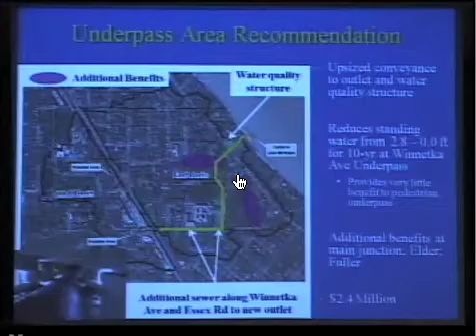The Cherry outlet is to the north of that. What we had recommended here was some new storm sewer on Sheridan Road outletting to the lake, which would have

a water quality and an energy dissipator. It would be an additional outlet. The reduction on Sheridan Road at Cherry Street would be for the 10-year storm from 0.4 feet of flooding depth

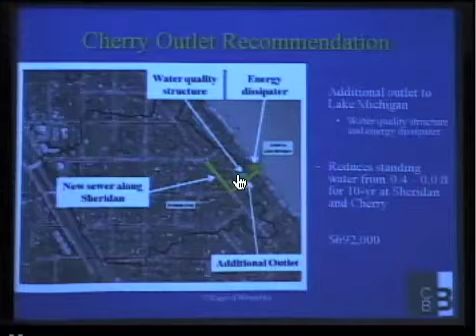to 0 feet, and this would solve several known flooding problems. The cost is about $700,000. So that's the Cherry outlet.

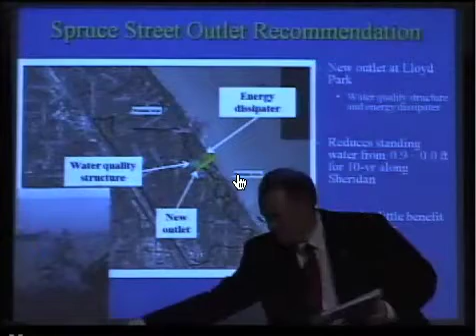So there's 2 of the areas. The third area, Spruce Street, a little further north at Lloyd Park.

Talked about putting in a new outlet right here at Lloyd Park, where we'd also, again, do water quality to try and improve the water quality before it goes into Lake Michigan, put in an energy dissipator again.

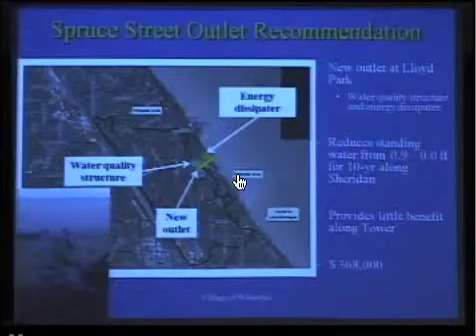And this was the one where we had a problem area here at Tower and Tower Road and Foxdale. Just north of Foxdale, just north of Tower, where Tower intersects.

There was little benefit unless we had to extend a storm sewer up, which would be very expensive. We have looked at some other ideas, but the one we focused on here was reducing the flooding on Sheridan Road about a foot deep to, with this project, it would be reduced to about 0 feet.

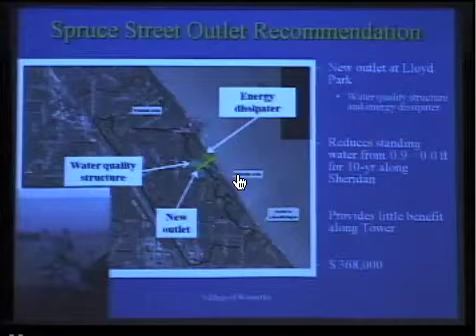This total cost is about $370,000. The next one, even continuing up Sheridan Road, is the ravine.

There is significant flooding that occurs at the low spot in the ravines. You have about 200 acres coming from Glencoe that flow down to this point, about 100 acres from the south in Winnetka, that converge and try and make its way out to Lake Michigan.

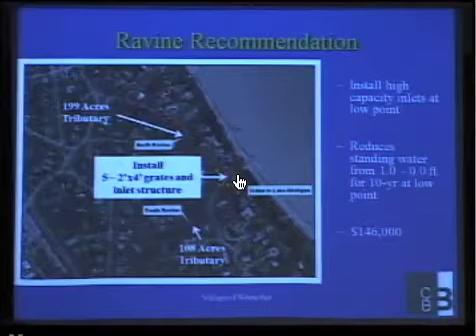Some of it goes underground that you don't see in storm sewer, but a lot of it flows down the roadway to this low point here, coming from Glencoe as well as from Winnetka. It flows out here, and really it overflows the road about, for a 10-year storm, about a foot deep, which is not passable at that low spot.

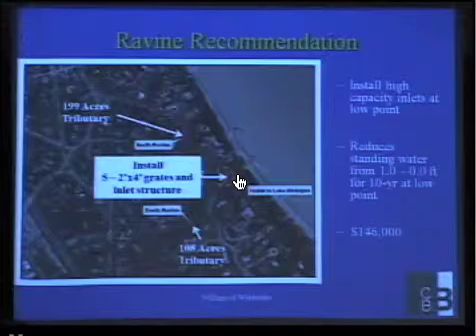So what we've talked about doing is putting in some grates to try and convey that water under Sheridan Road into Lake Michigan so that it doesn't all overtop and make the road impassable. That reduces it from about one foot for 10-year storm down to 0 feet.

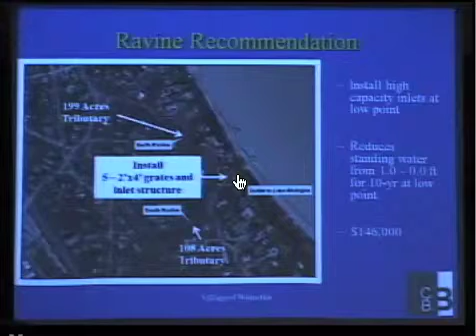That cost is roughly $150,000. And then where we left off last time was Greenwood Avenue.

So here, again, the water is all trying to make its way to the pond at the southwest corner of the study area. The study area being in black.

Everything in black is tributary to the pond, either right by the diversion ditch, or if it can't go into this pond here by gravity, it gets pumped into the diversion ditch.

So we made a recommendation for pump station modifications that Steve had mentioned, as well as putting in 2 laterals shown in yellow here, extending north from Tower Road on either side, east and west of Greenwood.

Those laterals would be on private property. They reduce the flooding there that's currently about 1.2 feet deep for a 10-year storm to about 0.7 feet deep.

Why not 0? Well, 0.7 feet gets us below the low entry elevation of the houses there that all reported flooding and that have had historic flooding. So while it doesn't eliminate the flooding, it makes sure it gets below the point where it enters the houses.

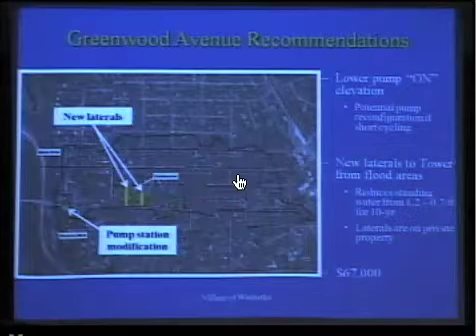That's for a 10-year storm. That cost is about $70,000 for that recommendation. The next area I want to talk about was the Provident study area.

Shown in yellow are the different flooding areas that we identified. Locust and Westmoor, Locust and Starr Road, and continuing further south, Provident and Oak, and then on both sides of

Ash, at Provident and Ash, and then finally at Provident, all the way ties down to Willow Road and continuing to the west. So those yellow areas are what we identified as problem areas, both from the questionnaires as well as

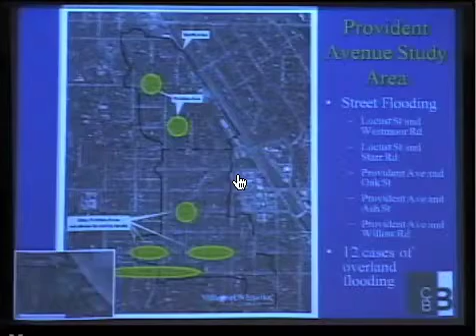working with the village. There were 12 cases of overland flooding reported. In general, the flow is from north to south.

So all this area in black here is all trying to get down to Willow Road, the storm sewer on Willow Road, which then comes down to the forest preserve, goes diagonally across the forest preserve to the pump station

when the water's high. So that water from the north is trying to get here. There's about 200 acres total. About 80 acres of it is in this north section here. It's trying to get to the south. Once it gets there, it continues south to Willow Road, and then west towards the forest preserve.

What we're really trying to concentrate on here is, because it's a large 200-acre area and we're very limited on what we can do on Willow Road as far as capacity and how much more we can send to the forest preserve, is actually providing a benefit. What we're going to focus on is this north area and trying to remove it from coming south. And that ties in with the 2009 study.

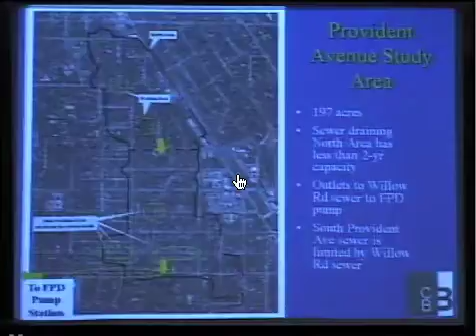So this next slide concentrates on this area here and the area to the west. Here's the study areas, the two northern study areas, and what we call the Provident area. Our recommendation is to take a storm sewer, instead of allowing the water to continue south, take it to the west, with a new sewer along here, and then by Washburn School utilize the underground storage, providing additional underground storage than what already exists.

Another 2 acre-feet, tied in with the 2009 recommendation, which was a storm sewer along Hibbard Road, an additional one along Pine and Ash, and then storage with the Park District, working with the Winnetka Park District to either provide storage north of A.C. Nielsen or down around Duke Childs Field.

That has to be combined with another outlet along Willow Road with a pump station basically right across from Public Works, not on Forest Preserve property, but across from Public Works on the north side of Willow Road that would pump it into the Skokie River just south of the dam.

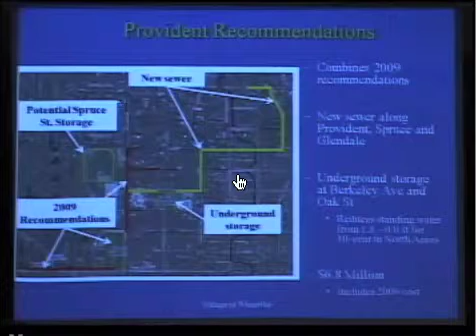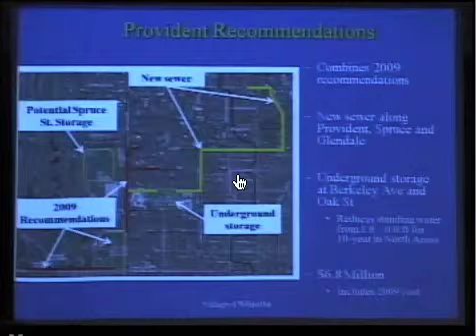This, again, combined with the 2009 recommendation, because it does not work without doing that, reduces standing water from 1.8 feet to 0 feet in those northern study areas that we have up here. 1.8 feet deep right now, down to 0 feet.

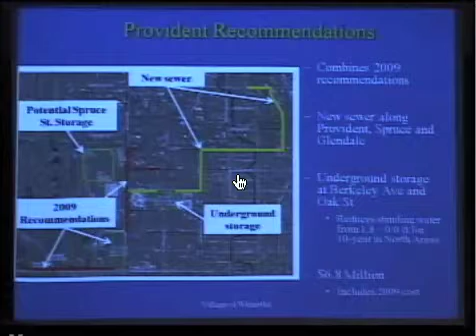The cost shown here, $6.8 million, includes $4 million from the 2009 study. So basically the areas in red, the pump station, the storage, depending on where it goes, was about $4 million. We've added about another $2.8 million for a total of $6.8 million to this project.

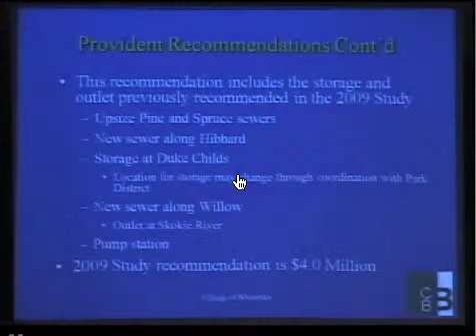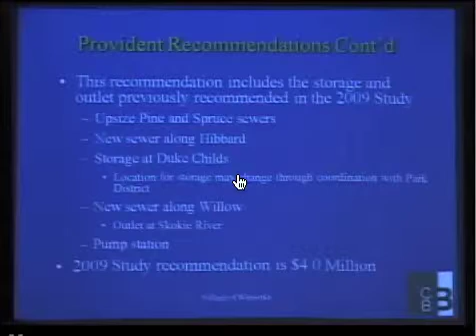Going through that, what are we doing? We're upsizing sewers on Pine and Spruce Street, a new sewer along Hibbard, storage at Duke Childs Field or the area north of A.C. Nielsen, new sewer along Willow Road, which would go to the outlet on the Skokie River, and a pump station. So as I mentioned, $4 million of that $6.8 million was included in the 2009 study.

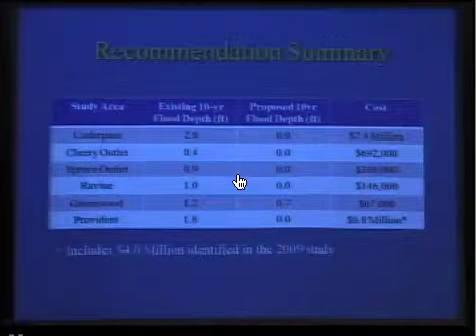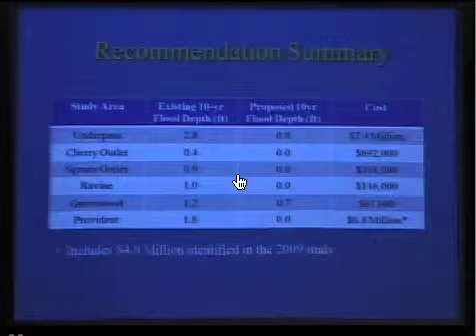Here's a summary of the different areas and the recommendations we had. Right now the underpass floods, all these are at the 10-year elevation, 10-year design. We went through that before with the 10-year meaning the 10% chance in any given year. So right now there's 2.8 feet of flooding. Proposed improvement costs $2.4 million, reduces the flood depth to 0 feet.

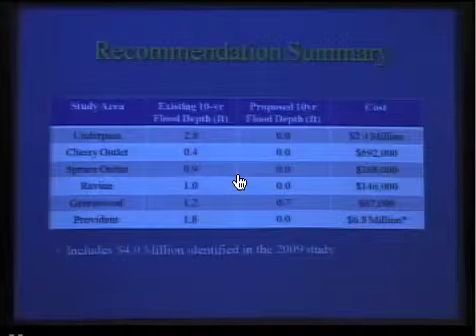The Cherry Outlet, 0.4 feet of flooding, bring it down to 0 feet, costs about $700,000. Spruce Outlet, about a foot of flooding on Sheridan Road, to reduce it to 0 is about $370,000. The ravine to make Sheridan Road passable during the 10-year event, where you have about a foot of flooding now, is about $150,000. Greenwood, where you have a maximum of about 1.2 feet, bring it down about half of that, is about $70,000.

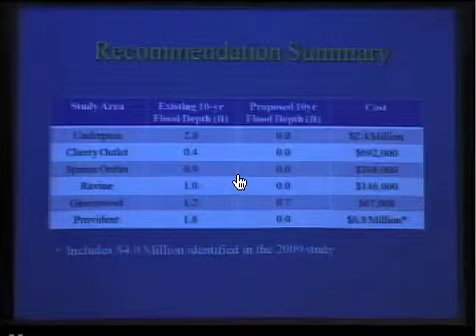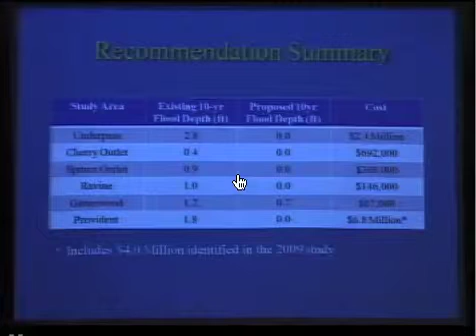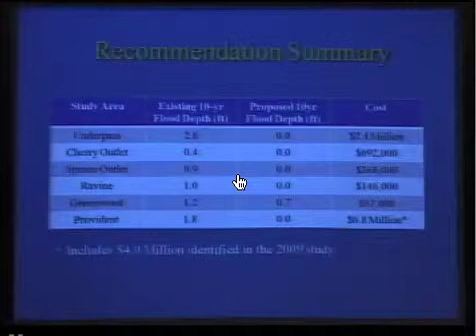And then the last one was Provident, which is 1.8 feet of flooding in the northern area. Separating that from the southern area is a benefit for that southern area, because now the storm sewer, which conveys flow for 200 acres, only has to deal with that southern area, and also helps Willow Road. It doesn't reduce any flooding on Willow Road, but it helps alleviate, takes off some of the drainage areas coming to there now. That project, again tied with the 2009 recommendations, is $6.8 million.

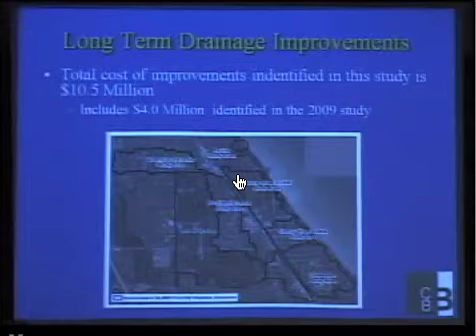So the long-term drainage improvements that we identified here was about $10.5 million when you add all that together. Again, $4 million of that came from the study we did when we looked at this area here on the east side of Hibbard, north of Willow. So $10.5 million from long-term drainage improvements.

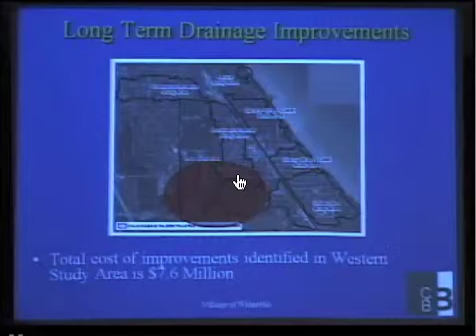Total cost for the western study area here was $7.6 million. That area shown in red, that was $7.6 million from our recommendations, both those areas. And so total together, when you add those two together, about $18.1 million.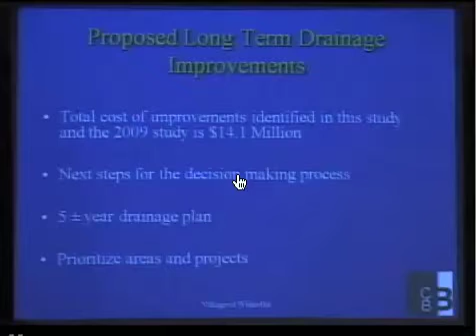So the next steps are obviously the decision-making process: what gets done, how do you decide what needs to be done, plus or minus a 5-year drainage plan, if you so choose, prioritize, how do you prioritize which projects, which areas get done. So there's some of the outstanding questions.

What funding sources are there? There's obviously cash reserves and pay-as-you-go capital. Bonding - we've worked with a lot of communities that have done bonding projects to pay for stormwater improvements. There's a stormwater utility fee option where all of the residents would be charged a utility fee since they all contribute stormwater, as well as every parcel being associated with a utility fee. It really depends on the amount of impervious area they have.

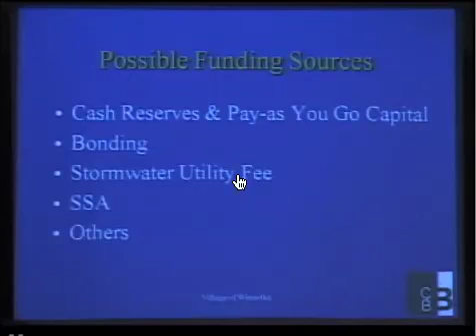There's also special service areas. If you decide to concentrate on one area and only have the residents in that area pay for the improvement, you can do a special service area. And there's others. Now, unfortunately, as far as grants go, there's very little money the state has. There is an HMGP grant, which is funding from federal declarations. Unfortunately, Cook County has never completed an application to have that done. So unlike some of the surrounding counties, Cook County communities are not eligible until Cook County finishes this application and gets approved. So although there's some money there, that is not available.